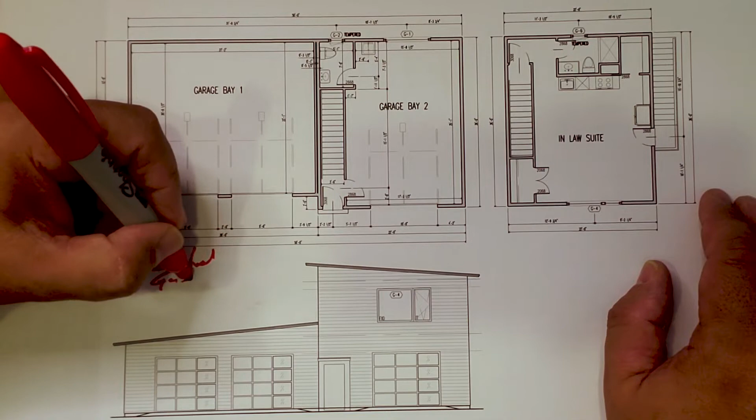All right, everybody, grab these images out of the drawing set. Got my good friend Big Red here. Let's talk about that outbuilding for a minute. So we knew right from the get-go, working with the clients, that they were okay with a detached garage. They didn't want it necessarily attached, and it was for a couple reasons. One, they wanted a potential in-law suite

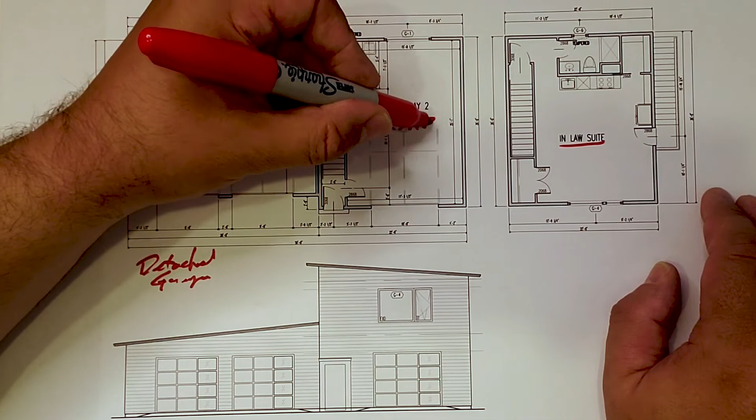available in the unit, as well as we have multiple garage bays, and garage bay 2 is also going to double as a workshop for the husband. He's a very talented furniture maker, just absolutely gorgeous stuff. So, hence, that's why we have the bathroom there.

But anyways, we have the garage proper here, which is your standard 2-car garage. And that one's about 30 feet that way and 24 feet this way. And you can see there's 2 garage bay doors. They're 9080s, and we have a person door on the side, so you don't have to open the garage door to go in and get a tool or something out of the garage.

But notice also that that is blocked off and doesn't get access to the 3rd bay. Now, the 3rd bay here is, like I said, its initial use is set up to be a workshop. So we have that workshop space here, but we still put a garage door, so it still has the 9080 garage door here.

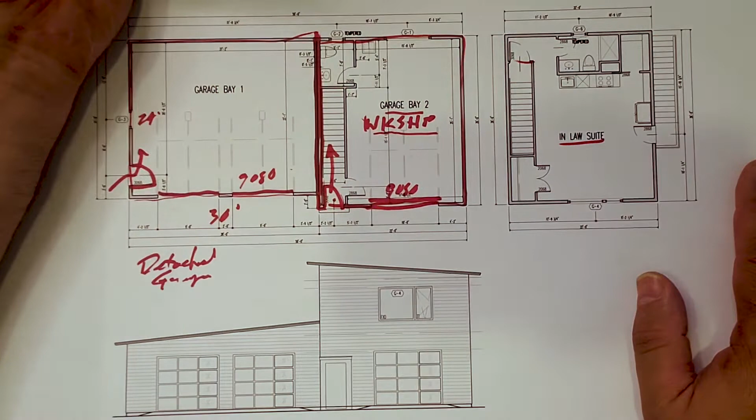We also have a secondary door here, and that secondary door gives you the ability to go upstairs to the in-law suite, and that would be the one that's lockable because the stairway has the potential to be locked there. But you can come in this door and you have the option to go upstairs or the option to go into the workshop without closing or opening that door.

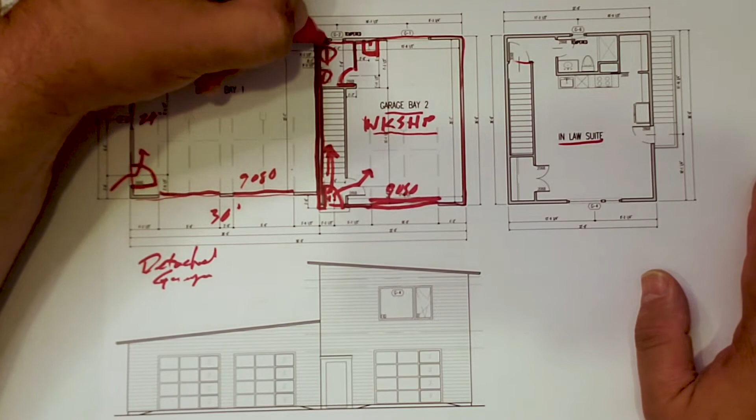The workshop is somewhat self-sustaining in that it has its own slop sink as well as a sink and toilet, tucked in underneath the stairs there. So you don't have to go back to the house.

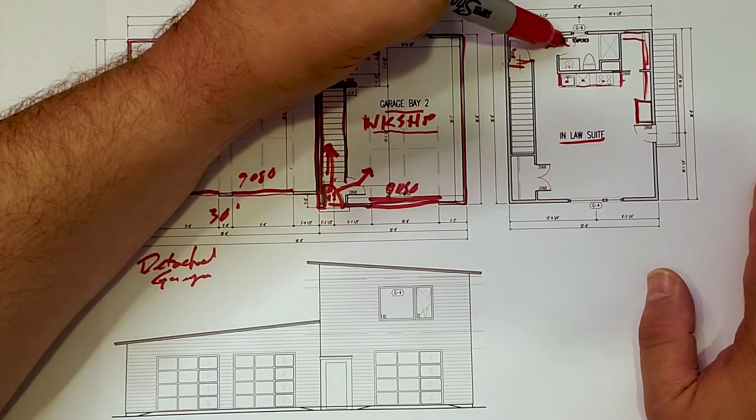Coming upstairs, you arrive upstairs, and it's a pretty simple setup. We have a small little kitchenette, the sink, dishwasher, small little induction range, some open shelving, a refrigerator, small storage pantry there. We have a full bath here with a sink, toilet, and a shower.

And then basically we have this large open room with a storage closet over that space that someone can put in a small bed or couch and have a small table in there, whatever kind of furniture suits your fancy, as well as we have a second means of egress for safety.

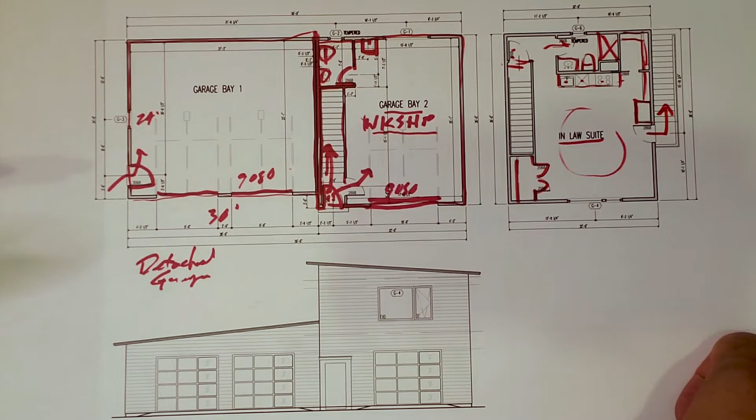So we have a second set of stairs that would go down there. They're not built yet, you're going to see in the slideshow, because we haven't built out the in-law suite as part of this phase. Those will get built out when we, in fact, build out the in-law suite.

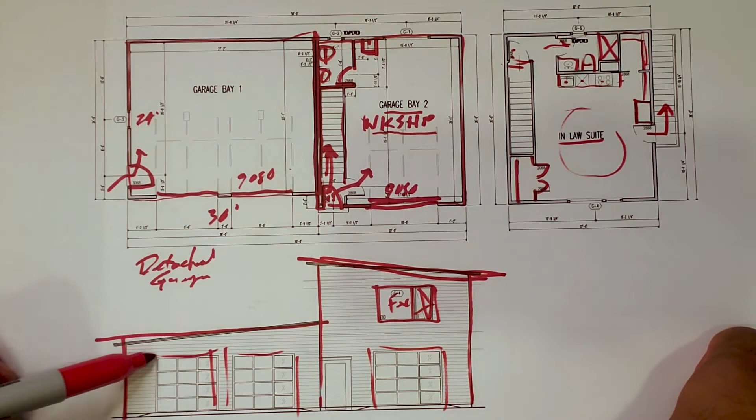Down below here you can see, nice simple elevations. They have that simple 1 in 12 roof, just like the house does. Opposing single slope. Got some nice big European tilt turn windows, some operables along with a fixed, some nice garage doors on there.

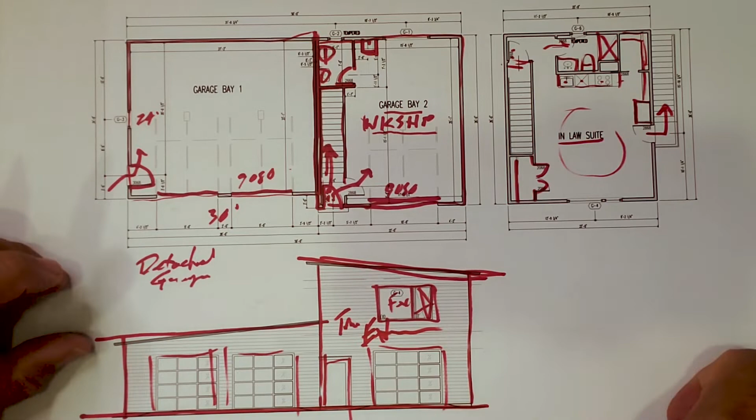That person door that takes us up to that in-law suite, and we have a nice little outbuilding that complements. It has all the exterior siding on here that we have on the main house, and all the detailing and such matches, the paint color, all of that. So we have a nice cohesive package.

The in-laws can certainly come over, stay for a while, or you have a little guest suite that's outside your house that friends and family can use when they come to visit, and he gets his workshop and you get your 2-car garage. So it's a win for everybody.